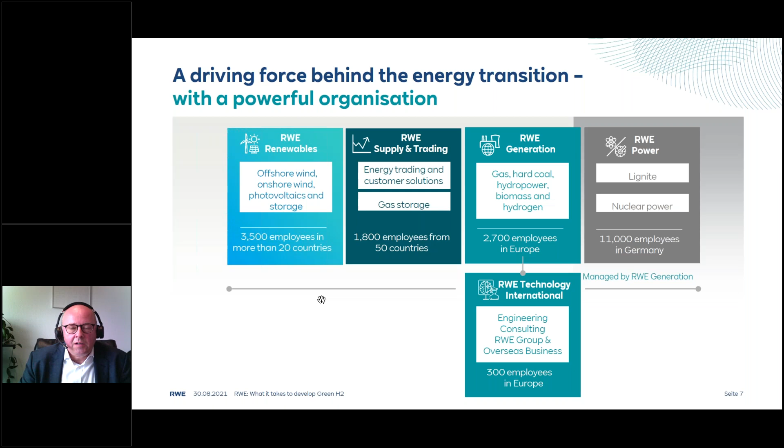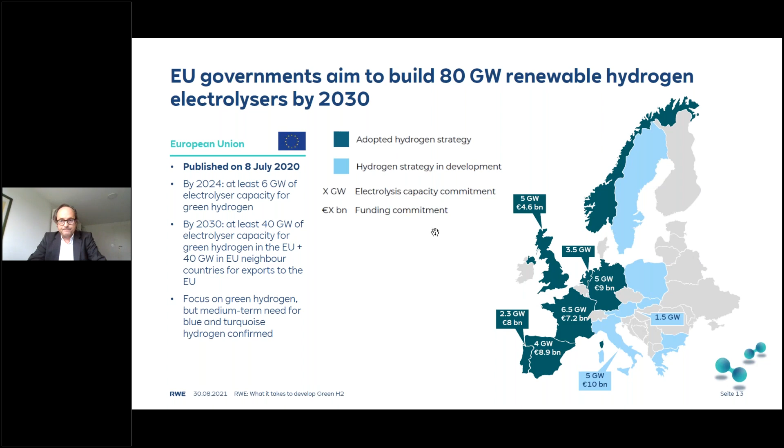If we can proceed with the next slide, please. Okay, that's me. In my presentation, I'd like to give you an overview of some H2 general thinkings.

Then I'd like to highlight some selected H2 projects within RWE, and I would like to give you not a guideline, but some interesting insights of what it takes to develop a green hydrogen project in Germany or Europe.

And maybe then, if we still have time, I will give you some technical insights of the state-of-the-art technologies. What are the pros and cons, or advantages or disadvantages?

I will give you a general overview of the economics, what should be taken into account if you develop a hydrogen project. And then I'd like to share some key takeaways which we have learned in one of our big projects. Next slide, please.

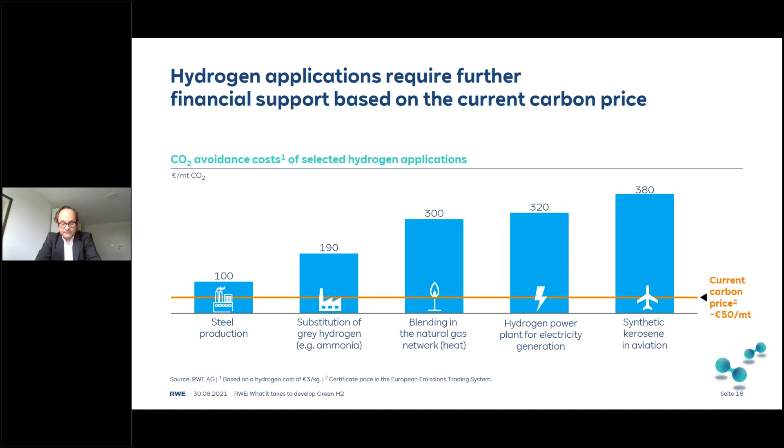Nevertheless, even though there's this economic challenge, we have to accept that hydrogen is one of the main keys to achieve the climate goals by 2050. As Ingo already mentioned, there are different targets in 2030, 2040, and also 2050 to achieve this zero carbon environment. There are four facts, or items, I'd like to share with you.

There are prerequisites for achieving these climate goals. Germany and the EU, as I said, can't achieve these climate goals without zero carbon hydrogen.

The second is that hydrogen has huge potential for manufacturing, transport, and heat sectors, especially to decarbonize areas where renewable energy cannot be used directly. The third is that hydrogen has storage capability. Hydrogen can store huge amounts of renewable electricity or renewable energy for long periods, and therefore it's one solution so that volatile wind and solar production can be used as base load.

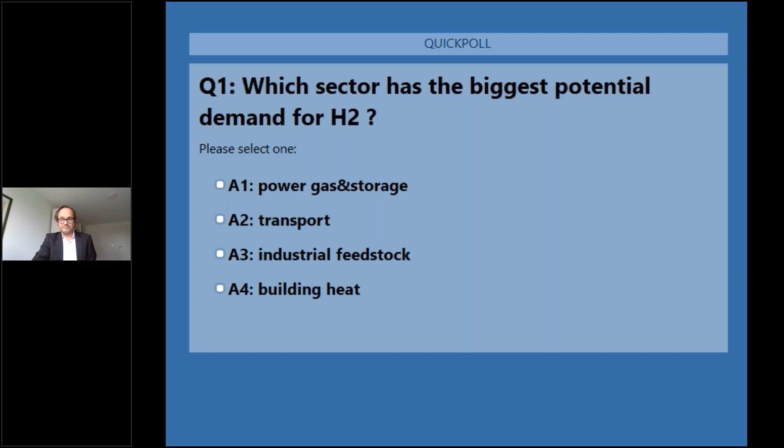Here we can see the prioritization. Yes, of course, the transport sector is fully right - this is the biggest amount of potential we have for H2. And of course, industrial feedstock and gas power storage are nearly in the same range.

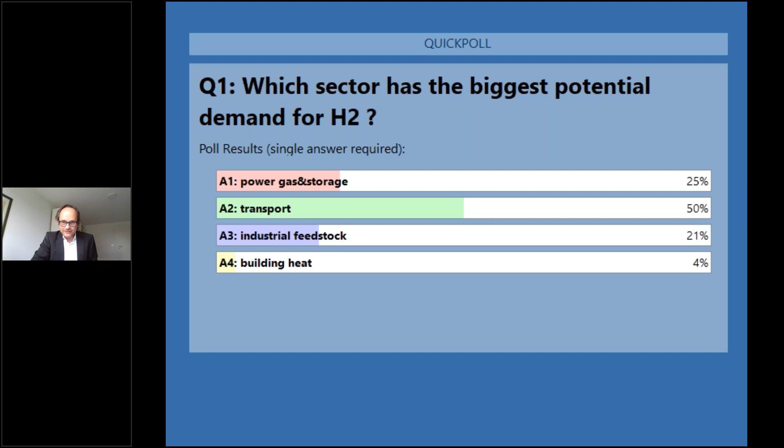Thank you very much for this - it gives me a clear understanding that you're still following my presentation. As I said, there are similar charts available for India, and therefore you have to see how to focus on the low-hanging fruits - where does it make sense to start first with hydrogen projects?

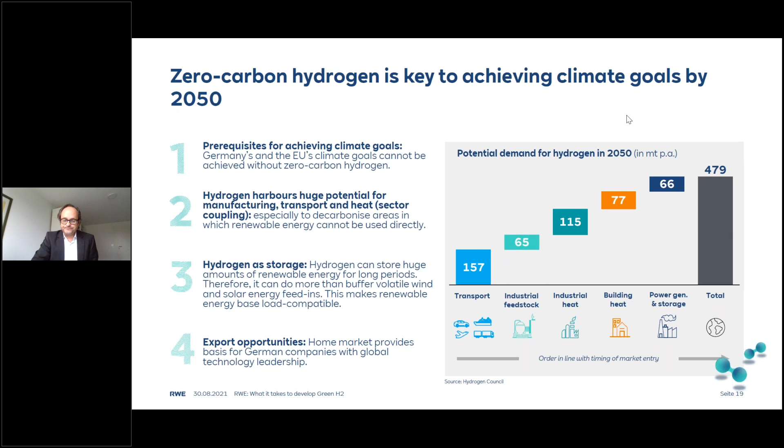As Ingo already mentioned, we have a strong hydrogen strategy within RWE, coming from a coal history, but now we are fully committed to hydrogen, and we can offer everything in the whole value chain.

We have the capacities and capabilities to produce green or clean electricity, which you need for green hydrogen - electricity from biomass, wind onshore, offshore, or photovoltaics, to avoid any CO2 in the electricity and in the production process for hydrogen.

Furthermore, we have high expertise in how to produce green hydrogen with electrolyzers and steam methane reforming, and we also have the capabilities to trade hydrogen internationally. We're able to store it, or use our own gas power stations as potential customers for green hydrogen. This underlines the strong strategy we have to become carbon neutral by 2040.

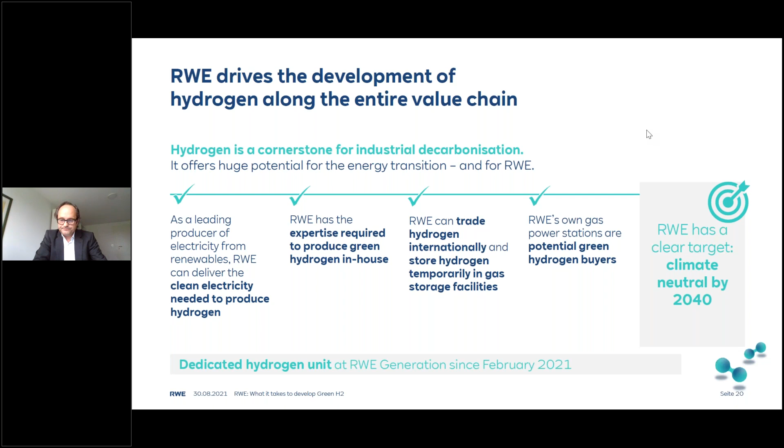Even though this repeats what I've already said, I want to highlight what we can do: electricity from renewable energy, hydrogen production and electrolyzer capabilities. We are able to handle hydrogen logistics, meaning storage and transportation challenges, and we are also familiar with hydrogen applications.

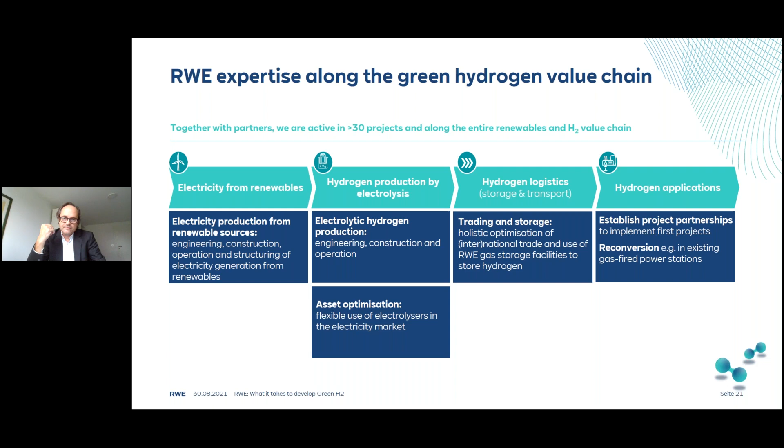How can this be done? This can be done by RWE technologies, where we have not only the intellectual capability, but also project management, engineering and consulting capabilities to develop those projects, starting from power generation and connecting this generation plant to the electrolyzers, which is very challenging because you always have to connect an often fluctuating energy source with baseload-running electrolyzers.

We are able to operate electrolyzers. We are able to handle power-to-gas applications, also power-to-liquid applications, and we are familiar with gas transport and H2 storage applications, and able to handle all necessary gas applications in-house. So everything can be done within RWE, concentrated in RWE technologies.

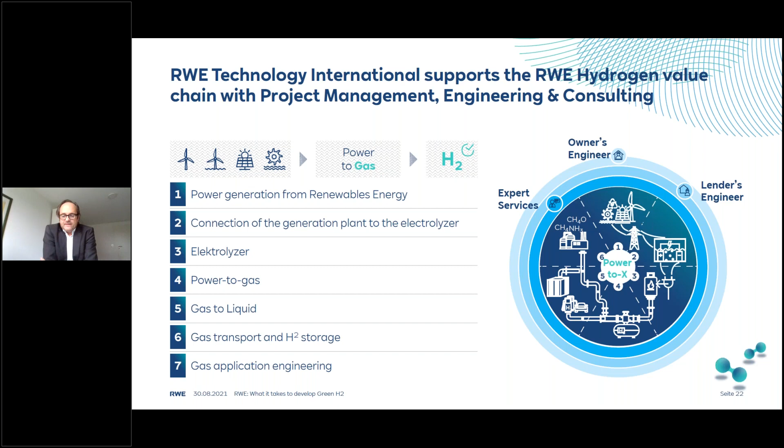This gives you an overview of how we can use existing infrastructure, for example in Germany, for hydrogen. On one hand, it's a very big asset you have. The pipelines are available, you have gas storage facilities, and you should use them, because when you shift from conventional gas to hydrogen, you shouldn't get rid of the existing infrastructure, because it's a real asset, and a very costly one, and you can use it as we see.

We assume that most of the European long-distance gas network can be retrofitted to hydrogen. It's not an easy way, so it's not just saying, oh, we get the gas out of the pipelines and put hydrogen in. No, there are a lot of challenges, but they can be handled. You have to do feasibility studies and maybe technical modifications, but you should think about this.

And the same is valid for gas storage, that we use the existing salt caverns for gas, and they can be converted into hydrogen storage caverns. This is also a big asset, because then you have this application, as we mentioned before, that you can use hydrogen as storage for fluctuating electricity generation.

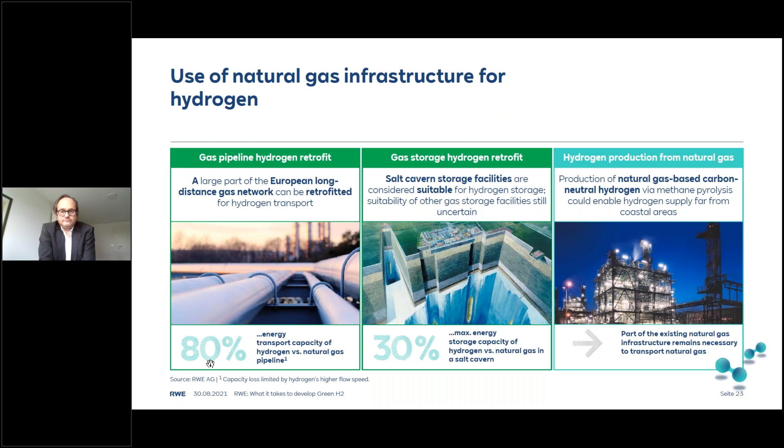Okay, coming to the next slide to give you an insight about the RWE projects we have. With this slide, I'd like to show you our funnel and how to achieve the goal of 1.8 gigawatts, which we hopefully expect in 2030.

There's a general assumption that when you develop a project -- and this is what I've also learned in my professional career in RWE -- you need at least 10 or more projects, and out of these 10 or more, only one becomes active or gets realized. On the right-hand side, you can see the percentages: at the beginning you have 100% of the project, and then it goes down until you have the project down to about 10%, which is a very good outcome from my perspective.

On the left-hand side, you see our so-called stage gate process. We have installed this process, and the project, or the opportunity or idea, has to pass different gates. In each gate, you have several prerequisites, conditions, and approvals you have to double-check or obtain before the idea or opportunity enters the next stage, so that the maturity of the project can increase.

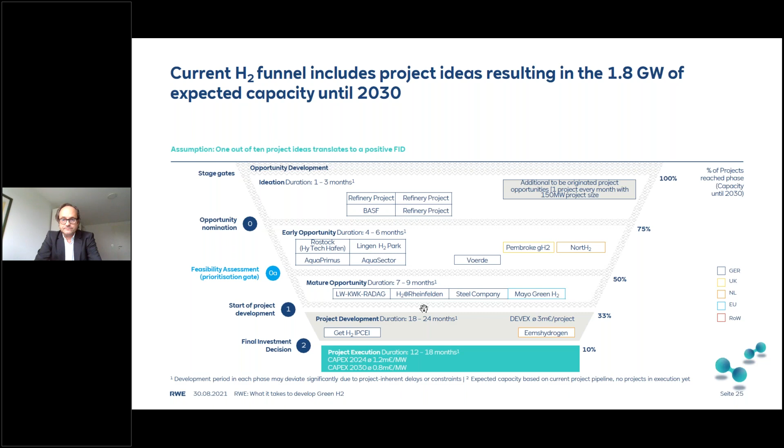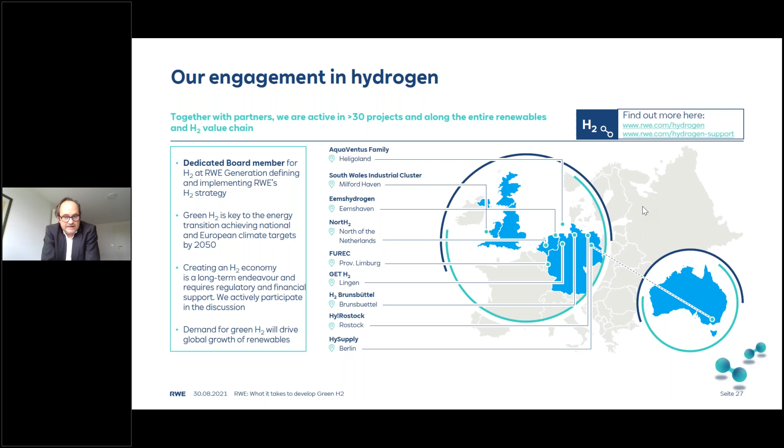Here I'd like to highlight some of our projects. The GetH2 Nucleus project, from my perspective, is a very nice example of how projects could be structured, or how, from a project development phase, you can try to attract politicians to become more dedicated to the hydrogen topic. This initiative was founded a couple of years ago, with a lot of partners active in the whole value chain: from electricity production, electrolyzer manufacturers, the gas grid operator, the grid operator, and the customers. In this initiative, it was said: we want to build the first 100, maybe 200 or 300 megawatt electrolyzers in Germany.

We are committed to this, but we have to see how the gaps - the economic and regulatory gap - can be closed. Having such a consortium in place gives you a strong force to start these discussions, and the people will listen to you.

The people in the town or surrounding area where you would like to build, and on an overall level, the government will also listen to you, because you have something to offer. You would like to build something, but you say there's still a gap which has to be closed, and let's sit together at the table to see how we can close this gap to make the starting point for these gigawatt initiatives, which were shown before when we saw the European targets for hydrogen.

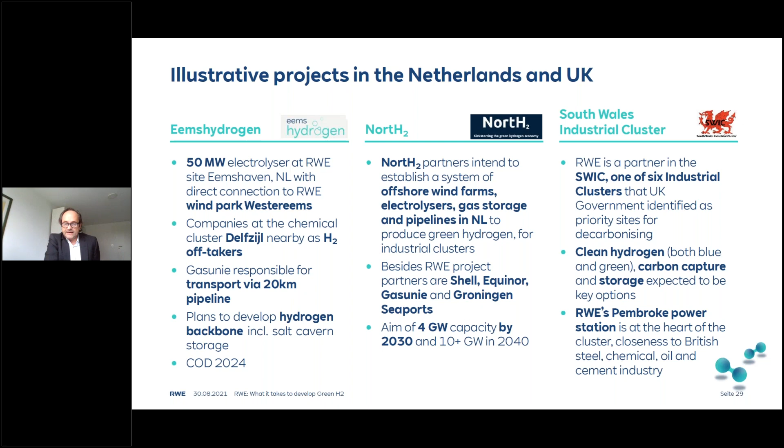As RWE Technology, we are involved in most of the RWE projects, so we have a very good overview of the maturity of each project, and this is what I wanted to highlight here - where the projects are. This goes in line with the 1.8 gigawatt curve I showed earlier. None of the projects is in the construction phase.

This light blue one is close to entering the execution phase. The other projects are more on the left-hand side, starting with conceptual thinking, conceptual studies, feasibility studies, or the procurement process, where we have procurement processes ongoing for all the components needed for the whole project.

We are in different tender and negotiation processes with a huge number of manufacturers to structure these projects and bring all the bits and pieces together. This is a very, very interesting learning curve and management challenge we have, and we are on a very good way.

We started in beginning of 2019, have gone through 2 years of this development phase, and now we are close to the execution phase. This gives you a feeling about the maturity of the projects we have. Maybe in 1 year this slide will look different, because then we'll definitely have the construction field shown in dark blue - this is just an outlook. The next slide, please.

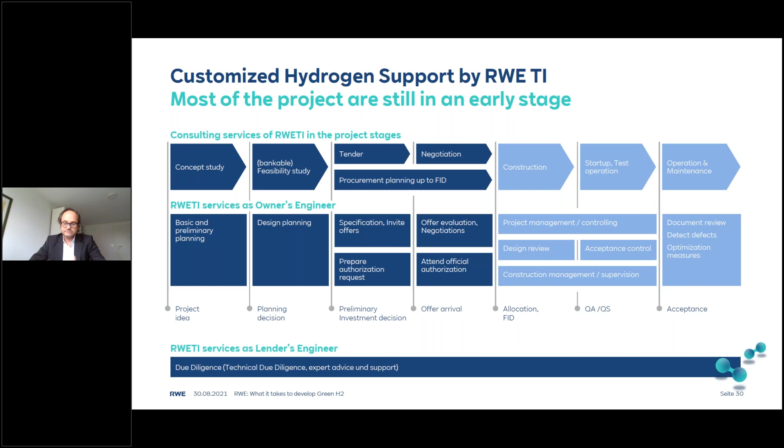These electrolyzers, because we are close to the coastline, will be connected to a wind park, and the hydrogen produced in Lingen has two directions to go. It will be fed into a pipeline, and on one hand, the pipeline goes to the refinery of BP in Lingen, and on the other hand, it goes via a more than 130-kilometer gas pipeline, which will be converted to a hydrogen pipeline, to the Ruhr area, and will supply the chemical park in Marl of Evonik, and also another refinery of BP.

This shows you the type of applications we have: on one hand, producing hydrogen near the coast, supplying some customers there, and putting the hydrogen into a pipeline and transporting it up to more than 130 kilometers to other customers.

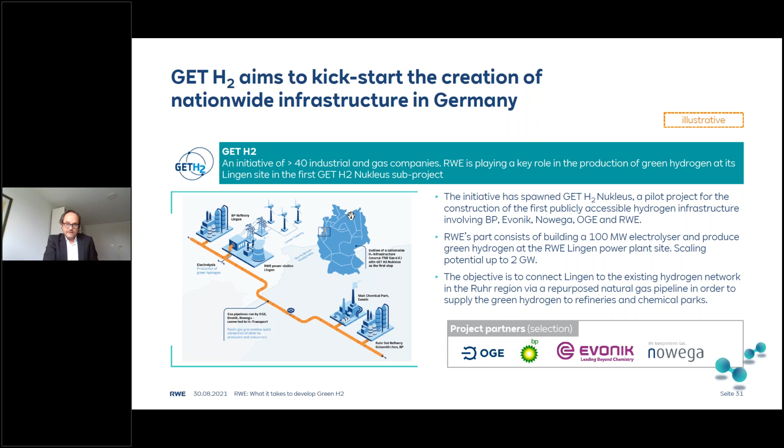This is the power plant Lingen, and this gives you an overview of what we have to do. I put in a schematic rectangle the electrolyzers there. So in this operating power plant, we have to integrate the electrolyzers, and this means sharing infrastructure, sharing cooling water, fresh water, wastewater, sharing electrical infrastructure, and so on, without any interruptions of the operation of the power plant.

And this is what I said at the beginning - it's a big difference whether you have a greenfield project or a brownfield project. And we are quite familiar - this is not the only brownfield project we have. We are quite familiar with this brownfield approach, because we have a very huge experience in the operation of conventional power plants, and this enables us to understand all the processes and to see how we can integrate an electrolyzer there, which also has a construction period of, let's say, 2 years. How can we make sure that there are no conflicts or maybe shutdowns of the power plant.

Okay, with the next slide, I'd like to summarize a little bit what it takes - what it takes to develop a green hydrogen project. So how do you have to think? Please, the next slide.

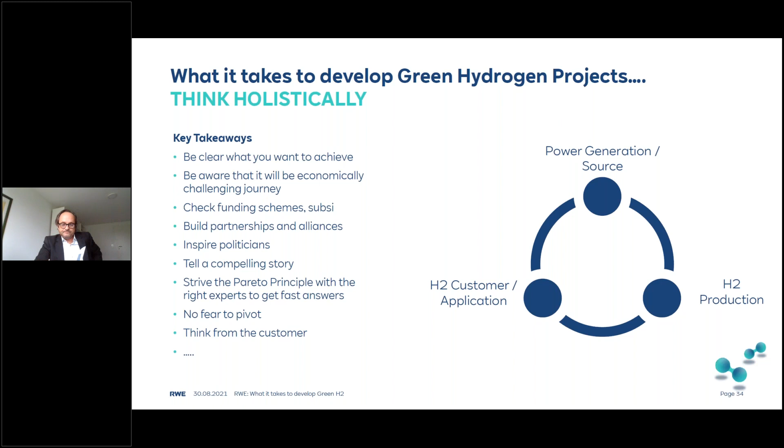Okay, next slide please. We are now entering the chapter on some technical basics. I just want to check whether there are some urgent questions. Oh no, doesn't work. Okay, I will continue with the technical basics.

Ingo has mentioned, let's say, the pink—or maybe the next slide, please.

Ingo has mentioned turquoise hydrogen. Just to have a joint basis of what we are talking about, there are different colors available for hydrogen, even though hydrogen has no color. The colors are just a hint at what the electricity source or the production process of the hydrogen is.

On the left-hand side we have gray hydrogen, which is the best available technology right now to produce hydrogen. It's steam methane reforming, and the big disadvantage is that you produce CO2, which you don't want to have, you want to avoid it, and then you get the hydrogen. This hydrogen is called gray hydrogen.

Then you have blue hydrogen. This is the same process, but you store the CO2 - you make a carbon capture and storage. I think this is a very interesting way to set the starting point for the solution of all the challenges in your hydrogen journey, because it's always hen and egg - you need customers and the need of hydrogen, but you also need the logistics or infrastructure, and you also need the production facilities. This is a huge amount of investment which is needed. With blue hydrogen, because it's available at short notice, you can start setting up the infrastructure prerequisites.

Then you have to think about pipelines - a new pipeline, or converting a pipeline. You have to think about a truck application, putting the hydrogen on a trailer and driving it over a few kilometers to the customer. But keep in mind that right now the capacity of such a truck is approximately 1 ton of hydrogen per truck, then you can calculate on your own whether it makes sense or not.

The next option is the liquid organic hydrogen carrier technology. This is a technology which is very young, where you put the hydrogen into a thermal oil and then transport the oil, including the hydrogen, from A to B. But to be honest, this could also be challenging from the economic perspective.

Sure, this is a simplified electrolyzer plant. You need the green electricity production, the cooling system, and the demineralization plant. Then we enter the core of the electrolyzer, which in principle is very easy - you have an anode and a cathode. After producing the hydrogen, you go through a separator, and you have to dry the hydrogen before it goes into a compressor, because depending on the application, if you want to put it into a pipeline, you need 80-90 bars. You have to compress the hydrogen, and then you are done.

But you should never forget that you still have two additional products in your process. You also have oxygen - think about whether there's an application for the oxygen, is there somebody who needs it? And depending on the specific technology, you also have heat available. Think about whether this heat can be used in a different process.

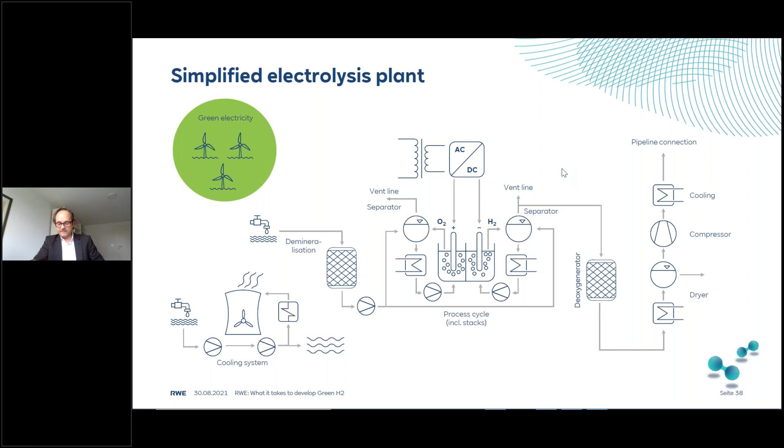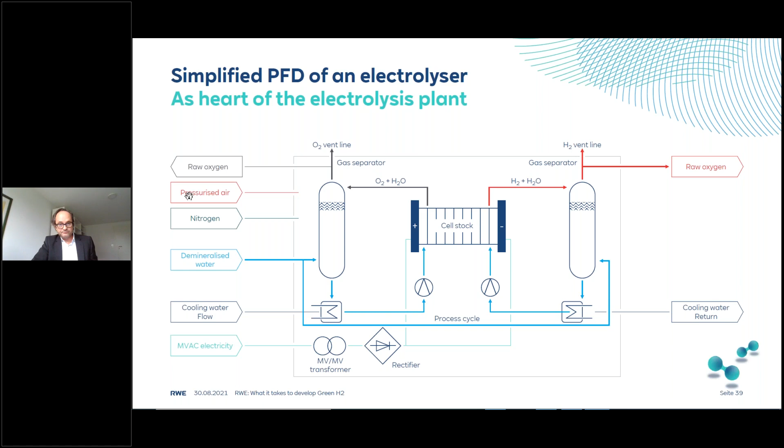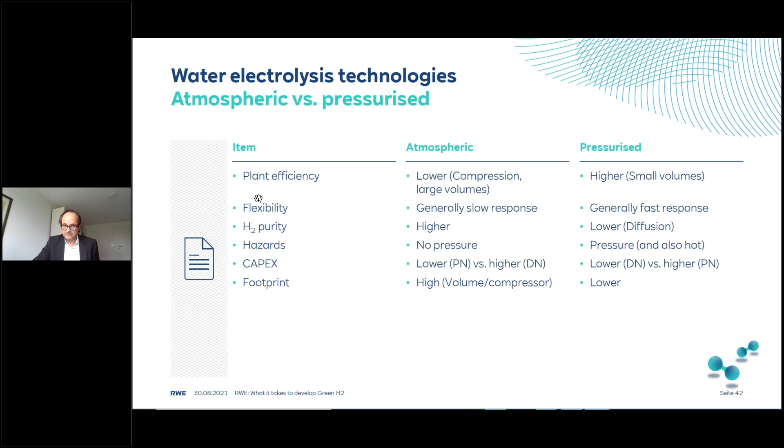What are the key takeaways from a technical perspective of our projects? The technology decision is not something you can just decide upfront - it's a highly iterative process. I learned in our project that we switched from technology A to B, and back from B to A, and then there were some other prerequisites and conditions, and then it was again B, and then A. You have to be flexible in your mind. You can't say from the beginning, I would like to go for alkaline because it's a bit cheaper, or I would like to go for PEM because it has higher flexibility. That's right, and also wrong, because you have to see how it fits into your project. It's a tailor-made solution you have to identify.

Integration of brownfield electrolyzers is very challenging - this is what we discovered. Nevertheless, it's possible, but it's something on top of your normal project development activities. You have to look into the electrolyzer plant in its entire value chain, not only technology driven - you have to consider commercial, regulatory aspects, etc. What we see is that alkaline and PEM electrolyzers are the most advanced ones and ready for large scale capacities, so they are commercially available.

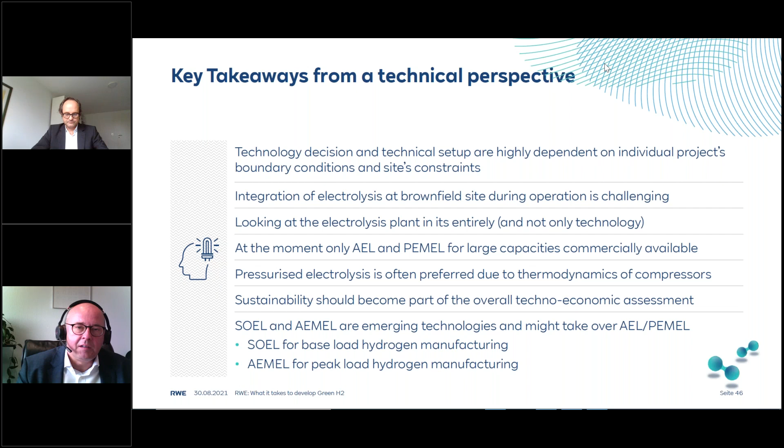Another colleague asked if existing natural gas pipes can be used for blending hydrogen. There's a clear yes, but you certainly have to look at the age and the coating of the valves and the sealings, but basically it can be done.